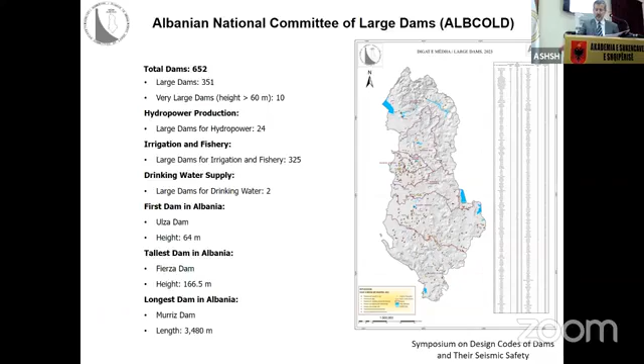The types of large dams in Albania are embankment dams, concrete gravity dams, concrete face rockfill dams, roller compacted concrete dams, rockfill dams with clay core, and rockfill dams with asphalt concrete diaphragm. Also Bovilla, which is a rockfill dam with a geotextile membrane.

The operation purposes of our dams are hydropower production, irrigation, water supply, transport, flood protection, aquaculture or fishery, solar energy, and tourism and urban development.

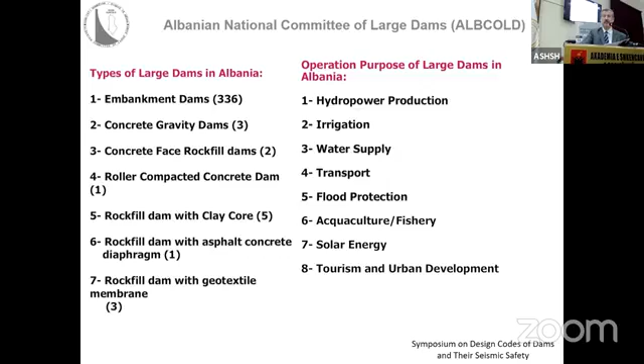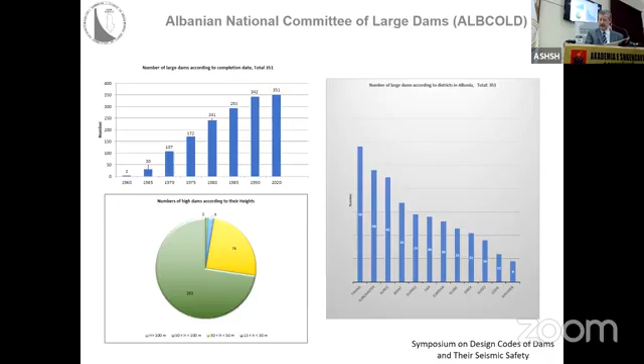Our legislation that is the basis for our activity is, first of all, our law number 8681 for the design, construction, operation, and maintenance of large dams, the law number 45 on civil protection, the decision of the Council of Ministers for the rules of dam safety, the decision on functioning of ALBCOLD, and the decision on structure of the Albanian National Committee of Large Dams.

Also, 2 years ago, there was another decision of the Council of Ministers for the determination of the procedure and terms to obtain the risk attestation for the subject, which is required for construction permission.

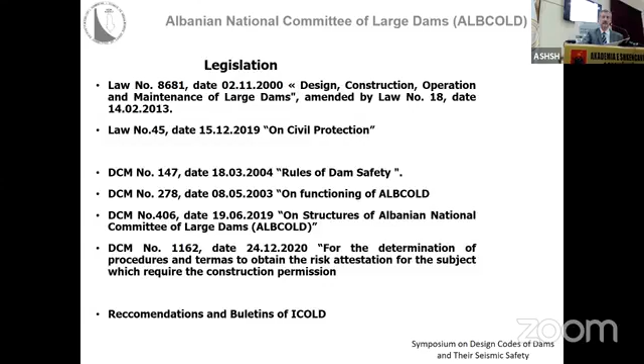This is the structure of our committee. Our committee is a government body under the Council of Ministers, with support from the Ministry of Infrastructure, with a technical inspectorate and technical secretariat.

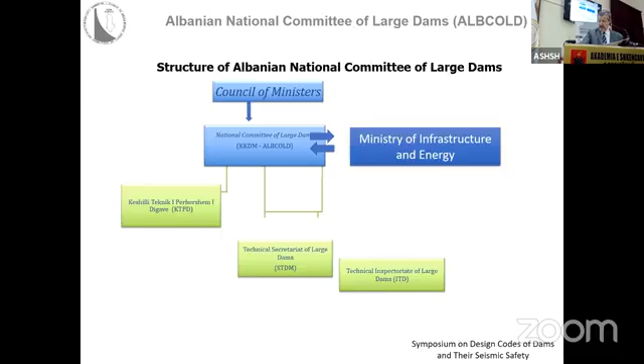Here are the main duties of ALBCOLD: exercise state control for the safety of dams, organize and approve the preparation of legal and technical documentation in this field, support technical progress in design, construction, operation, and monitoring of dams, promote the large dam sector, approve projects for construction of new dams as well as rehabilitation projects of existing large dams, inform the Council of Ministers about the condition of dams and give opinions on their improvement, and represent the Albanian state in ICOLD.

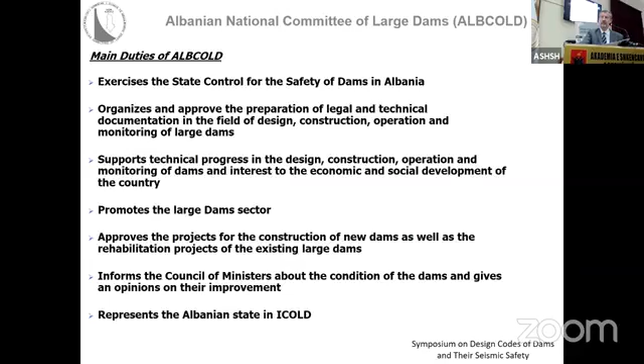Main problems of large dams in Albania: old age of large dams—a lot of them are more than 45 years old; increase of urban area below the dams; old technical standards for design, monitoring, and safety of large dams; sedimentation process of the reservoir.

Lack of maintenance and monitoring of existing dams, lack of technical audit from independent qualified experts and certification of dam safety, lack of study for the future of dams and their reservoirs, lack of dam asset evaluation and management, and climate change and environment protection.

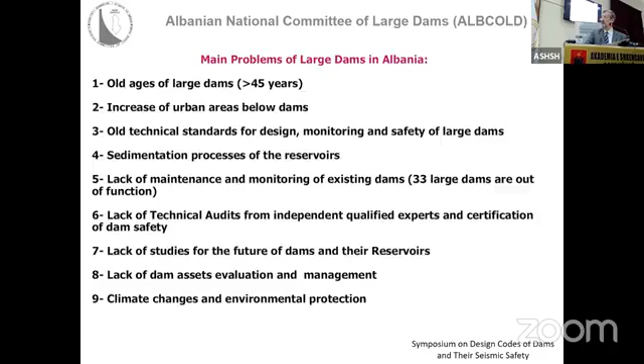Main challenges for the future of our sector in Albania: preparation of new technical standards for design, monitoring, and safety of dams; improvement and update of dam legislation; institutional and organizational reform in the dam sector according to European experience; modern programs for maintenance and monitoring of large dams; certification of dam safety; and training of new technical staff for monitoring and safety of large dams.

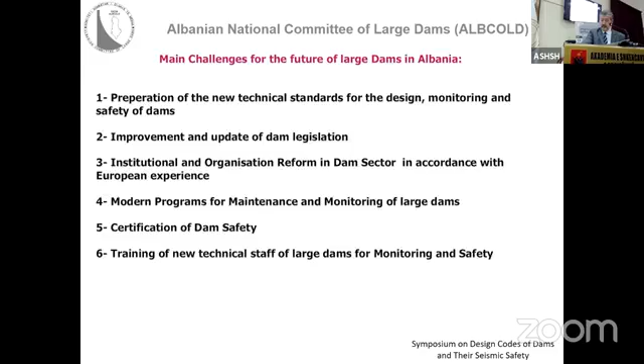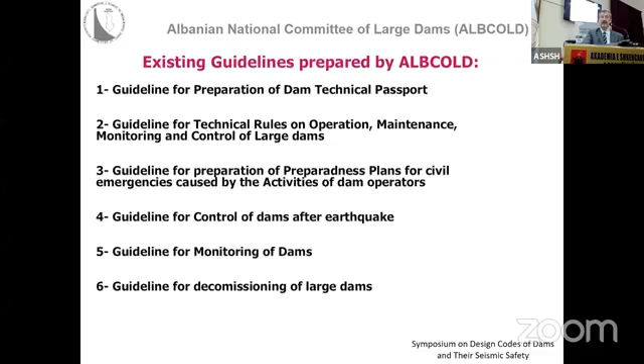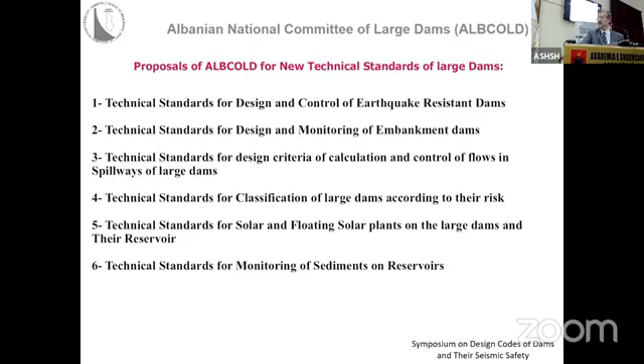I know this is a one-day conference about codes and seismic design, but I will focus on my own expertise and the benefits it has to offer.

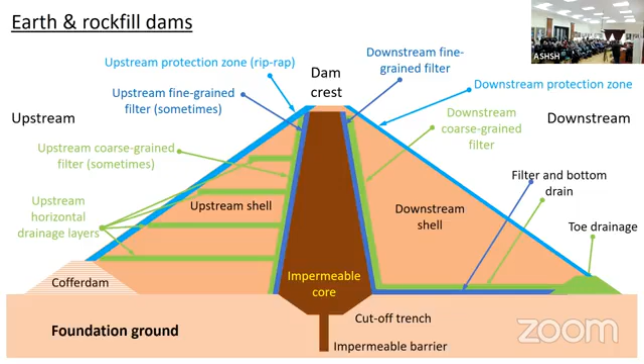You obviously know in this room the main parts of an earth dam. You don't need much explanation from me, but the main ones that actually contribute to the strength of an earth dam are the shells, the upstream and downstream shells, and the impermeable core itself.

Usually the shells are made of free draining, coarse grained material, although on occasion they can also be weak or weathered rocks. In that case, especially in the upstream part, we use horizontal drains to avoid serious conditions during rapid drawdown.

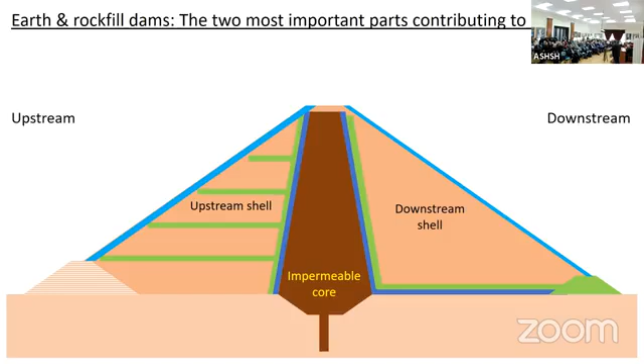Especially with seismic loading, we see amplification of the acceleration through the dam. We may have an acceleration at the base which becomes much larger at the crest. So when designing an earth dam, we have much more serious earthquake loading being applied to the dam.

There has been a lot of discussion worldwide about what is the appropriate acceleration to use. Most of the methods used today will do something I will show you in the next slide. However, we have even seen designs where, because of the very large acceleration close to the crest, they introduce reinforcement like the one used in reinforced embankments in the shells close to the crest.

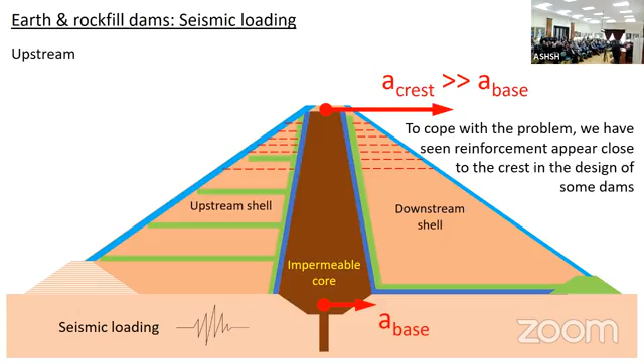This alleviates the problem because in the past we have seen very, very large accelerations being applied even when doing a slide analysis for the whole dam. This kind of separation sort of alleviates the problem and brings more representative values of the actual accelerations used in this kind of analysis.

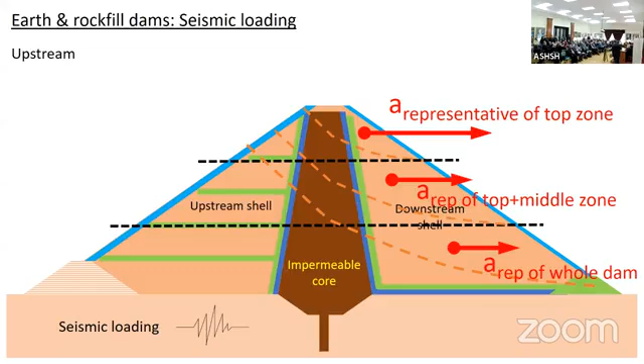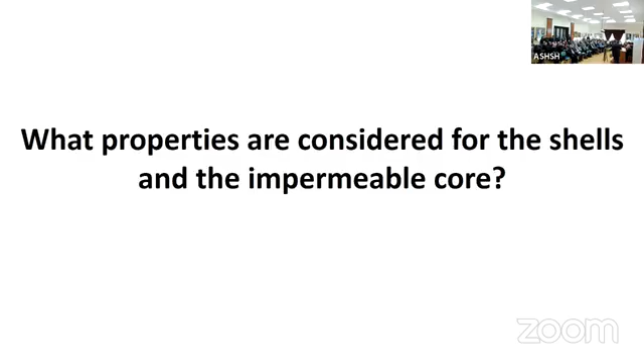However, my main focus is the following: what properties do we consider in the analysis we carry out for earth dams? Many times we have seen values as low as 35 or 40 degrees assumed, even for free draining shells used in earthquake analysis.

Here I have run an exercise where I have taken an embankment dam. For simplicity, I have taken out the earth core, the impermeable core, for a moment. What I have done is try to find out what should be the minimum inclination when performing analysis without seismic loading.

If you assumed at the beginning 35 or 40 degrees, and the actual angle of shearing resistance was 40, 45, or 50 degrees in this particular case, I calculated the increase that this kind of assumption introduces in the volume of the earth dam.

Please notice the figures. If you assumed a value of 35 degrees, you can expect an increase up to 15-16% if the actual angle of shearing resistance is 40 degrees for very high dams. For 45 degrees, up to 40%, and for 50 degrees, even up to an impressive 65%.

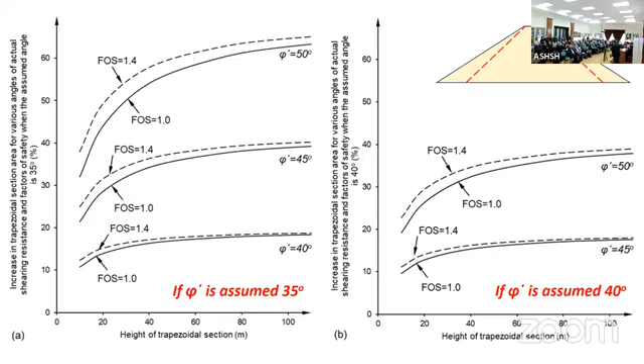A little bit of soil mechanics. After all, I'm the president of the Hellenic Society for Soil Mechanics, so you would be expecting some soil mechanics from me. A uniform soil has practically a single grain fraction. A well-graded soil has all the grain fractions present, minimizing voids and maximizing density. A poorly graded soil has some fractions not in the right proportion. A gap-graded soil has some fractions totally missing.

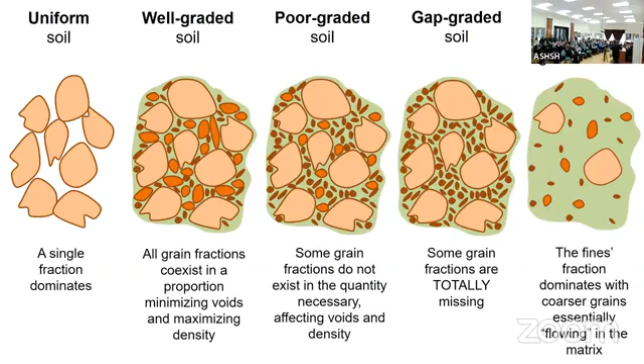The last part of my lecture will focus on materials with gravels and stones but also a very large proportion of fine-grained material. To put this into perspective with actual grain size distribution curves: this green one is what a fine-grained soil with gravel and stones looks like, this is what a uniform soil looks like, this is what a well-graded soil looks like, and so forth.

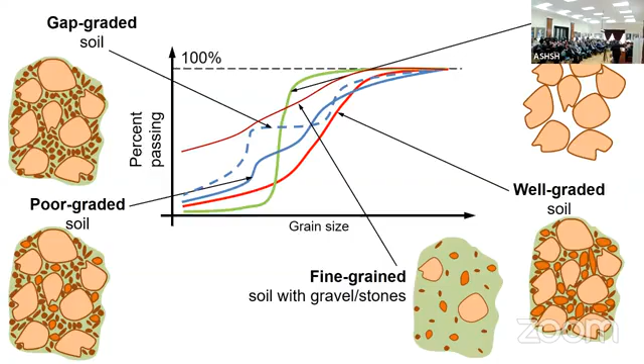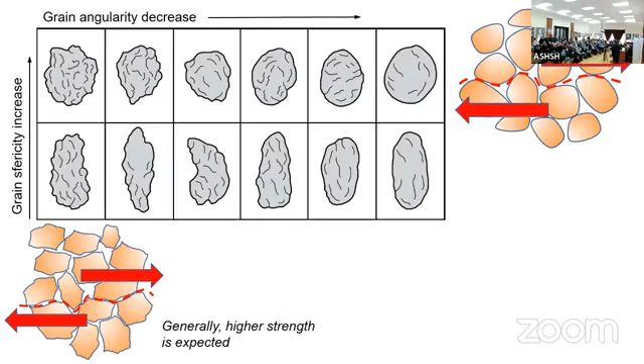Plus the effect of sphericity and also the angularity of the grains. Here I have a small picture which shows how the sphericity increases and also how the grain angularity decreases. We can see material like this that we actually obtain from rivers in order to construct our shells, or we can see material like this, very angular, which we are obtaining from quarries in order to construct our shells.

And this is one of my beloved devices in the laboratory of Edafos that I direct, a very large direct shear device. It's the largest in Greece. It has a shear box with 45 centimeters diameter and a maximum height of 30 centimeters. It was designed in order to be able to measure properties for very high dams, and this is why the vertical stress that can be applied can reach 3 megapascals.

3 megapascals. And also, this is one of my lovely pictures where we have the comparison of the shear box of the large device with its little cousin here that you can see, the shear box of a conventional device of 60 millimeters in diameter. And you can see that the maximum grains that can actually go into the big cell are practically larger than the sample that we can put in the conventional shear box.

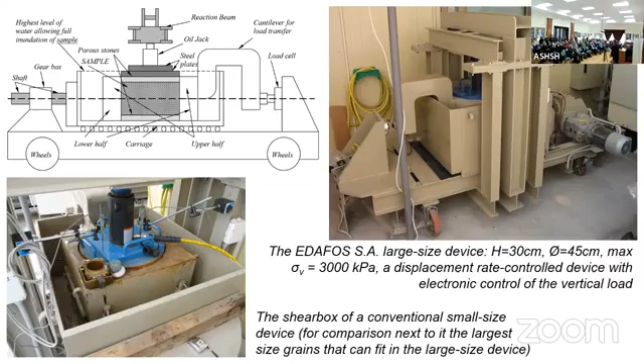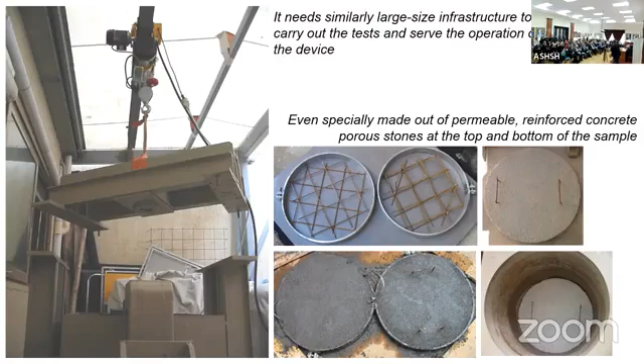This type of machinery needs a lot of infrastructure, large size infrastructure, in order to be able to cope with the various parts, in order to be able to cope with the quantity of materials you want. We are talking about a sample that weighs in the order of 100 to 120 kilos, each sample, plus special care for the porous stones. The porous stones for a small device is something easy that you actually pick off the shelf. But when it comes to a device this large, what is a porous stone? A porous stone is something that you actually have to construct yourself from a porous concrete in order to be able to use it in this kind of device.

So, first of all, let's look at some results from rounded, free-draining, coarse-grained materials and sand gravel mixtures. These are river materials that we are going to see. Lots of materials from many areas of Greece. These are primarily of limestone origin. I have focused in this lecture on limestones because it's a material that we also find in Albania as much as we find in Greece.

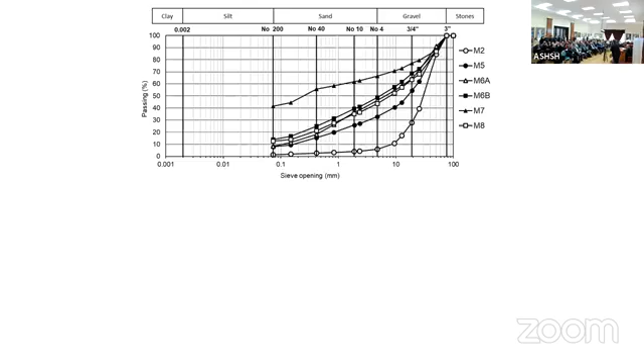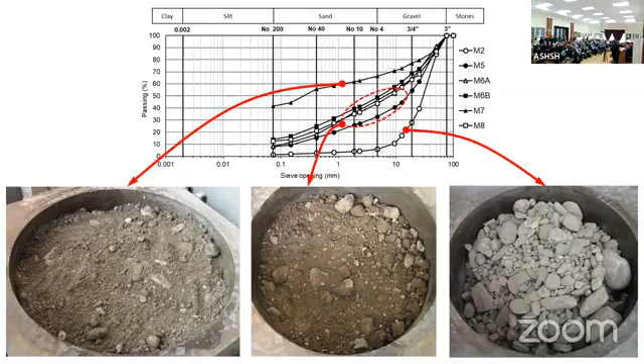And I have some examples in order to be able to relate these grain size distribution curves with the actual material. So here we have a material that is very close to a uniform material, and you can see the maximum grains that can be placed in the device. Here you can see some well-graded materials in the middle, and here you can see a material like this, which has a lot of fines. In this particular case, mind you, these are fines that are non-plastic. And here are the results. Here also to relate with these nice pictures I had before, and here are the results.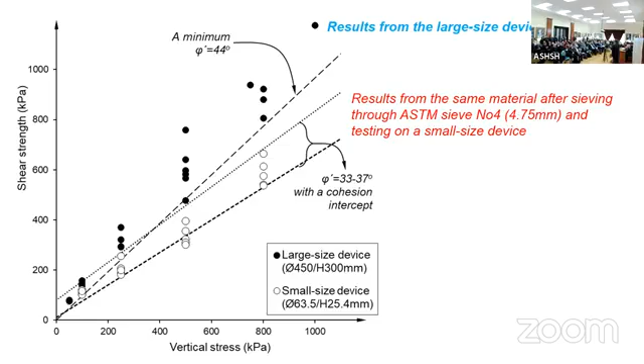I'm not going to do any special analysis. Yorgos Belokas is going to present some very cool engineering analysis in the face of Eurocode 7 later on in the afternoon on the same results, but please look at the differences. The minimum value of the angle of shearing resistance measured in all these materials from the whole country was 44 degrees. The minimum. And if you compare to what you would obtain from a conventional shear box device, if you had taken all the coarse grained out, it would be in the order of 33 to 37. So try to look at the benefit we can expect here and look at the minimum values.

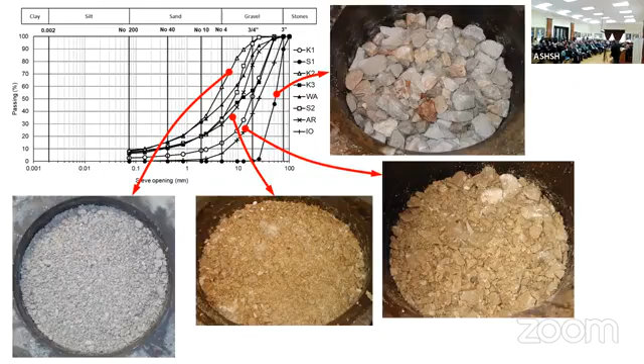And then if we go to angular free-draining coarse-grained materials from quarries, again, only limestones this time. Again, I have some pictures in order to be able to relate with the grain size distribution curves. Uniform soils, well-graded soils here and here, soils with many more fines that also come close to sand with gravel.

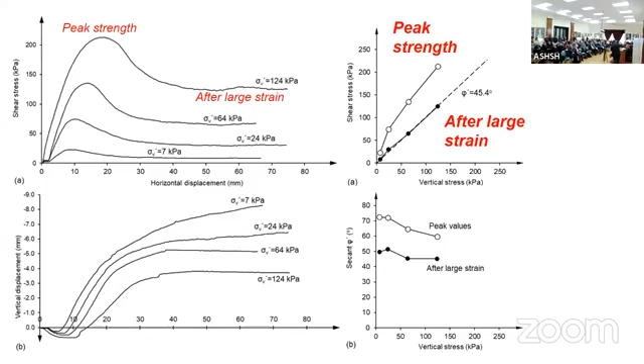And here I have a typical example, because in this case we have used some very high relative density samples in order to measure the shear strength, and you can see how the peak strength develops and then it falls to the strength after large strain, and you can look, for a specific soil, at the amount of difference between the peak strength and the strength after the large strain.

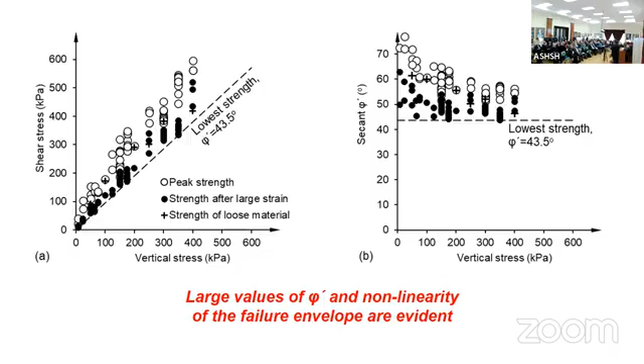And again, I will focus on the general view of things. Please again look at the lowest strength even after large strain. It never falls below 43.5 degrees again. And if we go to the peak strength, somebody may argue that I can use it when it comes to seismic loading. It never falls below 50 degrees.

And especially because of the non-linearity of the failure envelope that we have in coarse-grained materials, expected because it is like having a rock mass which is very broken, where we would expect non-linearity. So this is something that comes very close to rockfill. You can see that for very low vertical stress, the values are extremely high and much higher than the values we use in common design assumptions.

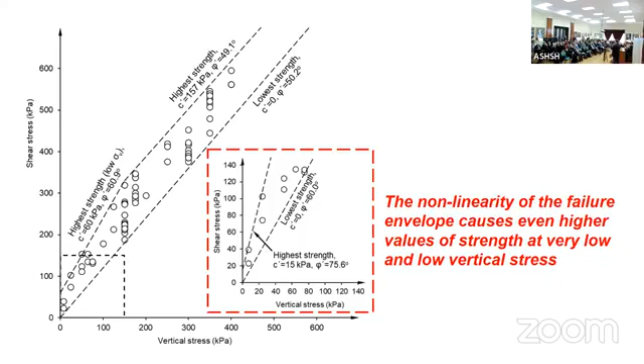And even if you go to the values after large strain, again, you can see that we have these values of 43.5 degrees, even up to 52. And especially for the low vertical stress, again, due to nonlinearity, even above 45 degrees. So again, there is benefit here to gain from actually measuring and making sure that we keep measuring in the construction of our dams the values of shear strength that we can obtain from these materials.

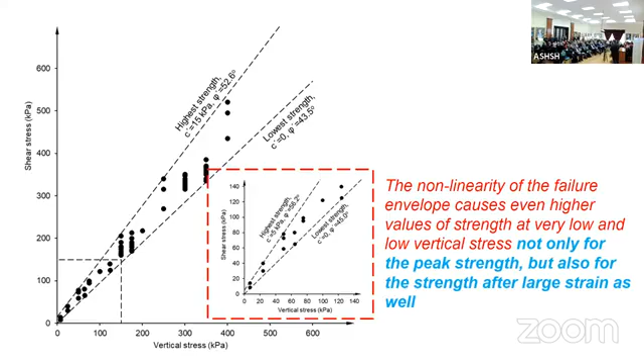And finally, we often fantasize, I use on purpose the specific word, we often fantasize when we talk about impermeable cores that they are made of pure clay. Well, the reality has shown that this role of the impermeable core has often been fulfilled by weathered or weak rocks, like flysch, a very common material that we can find also in Albania, chalk, weathered gneiss, serpentinite, schist, and whatever weathered rock we can find.

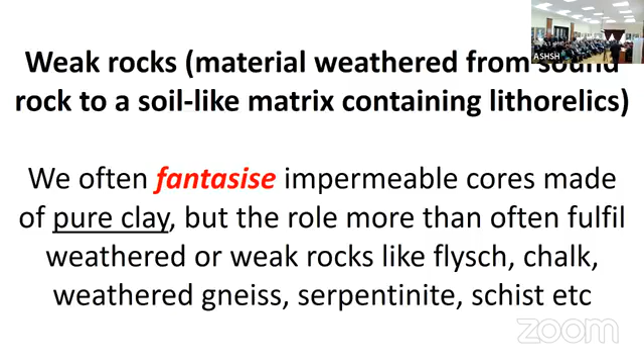Again, this material can be placed in the device with one additional benefit, that exactly because of the size of the device, we can place instruments inside the shear box that will measure the pore pressure that may want to develop along the sliding surface. The problem of the shear box is that quite often we are afraid that what we are measuring is not really drained. And this is a problem we have in the small devices.

But if you go big, this big, then you can take off the market a common sensor that we use and we place in actual large dams. This is the kind of sensor we would place in the field. You can place it in this kind of device and know the actual pore pressure that is being developed along the sliding surface.

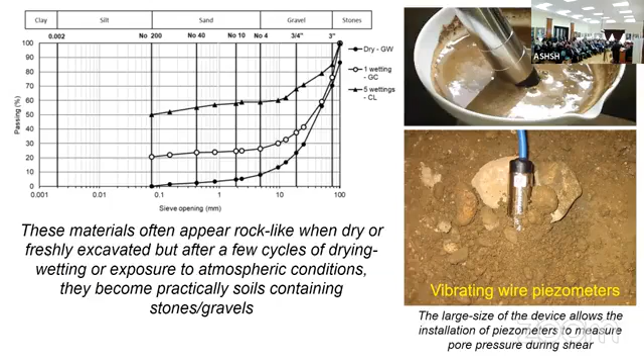So these materials, we see them in the field and they look rock-like, but once we introduce a couple of wetting-drying cycles, they actually turn to a fine-grained medium with stones and gravels. We can measure the pore pressure and actually use it in order to interpret the shear strength data that we obtain. And here is the look of it.

Weathered schist, weathered serpentinite, weathered gneiss, weathered siltstone, flysch, chalk, materials that we normally assume or measure in small size devices, angles of shearing resistance in the order of phi 25, 26, 27, 28, and yet these materials have a much larger angle of shearing resistance, especially combined with a value of cohesion.

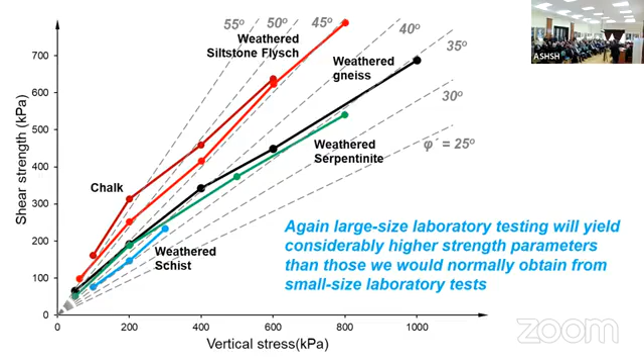Therefore, quite often, the strength of both shells and impermeable cores is being underestimated. We are using assumptions which, yes, are on the safe side, but they cause the need for larger volumes. And also, when it comes to seismic loading, exactly because it introduces a need for higher strength, we have many more problems, and we have seen even the need for reinforcement close to the crest.

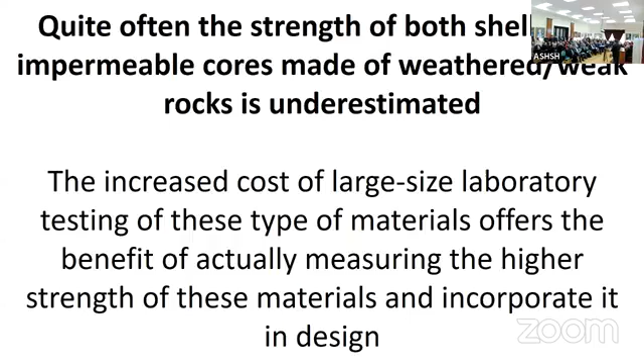The kind of results I have shown you is that if we actually go forth in measuring the properties of these materials, there are a lot of benefits in order to cope both with the seismic loading and the need for lower volumes.

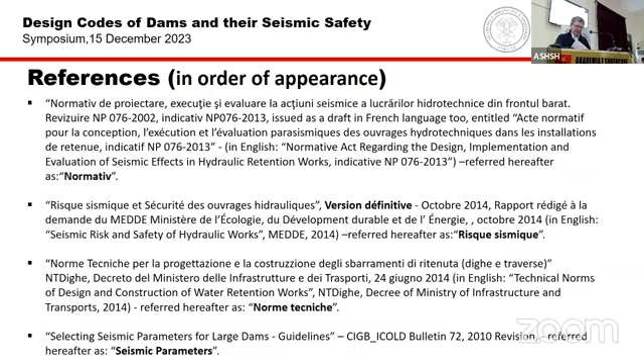We will start this presentation with our opinion, supported by a series of arguments, that Albania must improve its rules regarding the seismic design of dams and other hydraulic structures. Hereafter, for simplicity's sake, all these structures will be referred to as dams. As known, for other engineering structures, such as buildings and bridges, a few years ago Albania effectively adopted a series of structural Eurocodes, more specifically Eurocode 8, Design of Structures for Earthquake Resistance. However, dams are not included in Eurocodes.

At this point, improving the rules and provisions for seismic design of dams is necessary, as a considerable amount of time has passed since the last revision. Practically, it occurred 35 years ago. It is now obvious that Albania must reflect as soon as possible the achievements in the field of seismic analysis and design of dams during the last 3 decades. A new engineering code would ensure a safer seismic design as well as a better approach to the rehabilitation or strengthening of existing dams if needed.

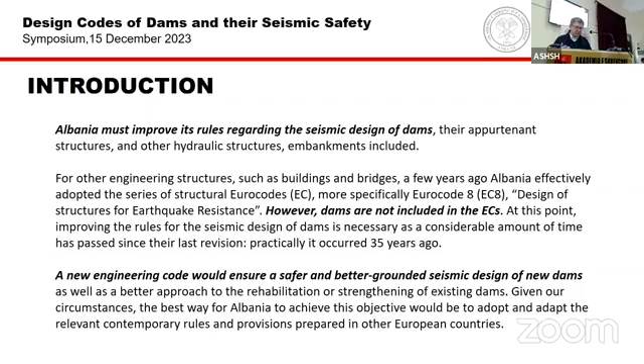Given our circumstances, the best way for Albania to achieve this objective would be to adopt and adapt the relevant contemporary provisions prepared in other European countries. In various seismic-prone countries around the world, there are numerous technical documents, rules, and guides concerning this issue. Normative notes that in 2004, the ICOLD European Club prepared a summary guide collecting such documents from European countries. Other similarly valuable works may have been carried out later, but they have not been available to us.

To our knowledge, a unified European standard to cover dam design, or even only a seismic standard as the Eurocodes are, does not exist. At the same time, there is an excellent source that provides useful engineering material on dam safety in all aspects: the International Commission on Large Dams, ICOLD, called in French Commission Internationale des Grands Barrages, CIGB. For a long time, through its bulletins, ICOLD has been regularly producing publications containing various technical experiences, guides, and recommendations that are very valuable to the hydraulic engineering community.

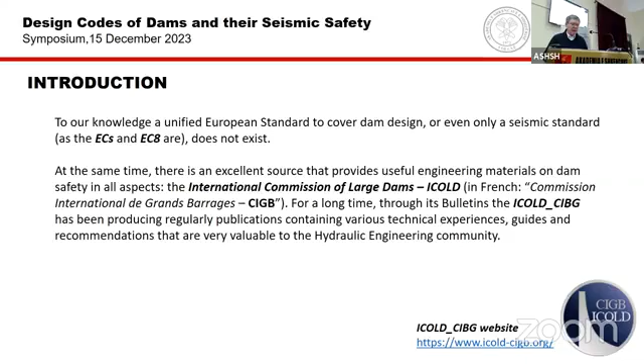So when preparing and adopting a document with provisions regarding seismic dam design, thousands and thousands of pages provided from ICOLD and other sources throughout the world are available as reference guides. However, in the case of Albania, a country that aims to join the European Union, it would be more appropriate to adopt provisions similar to those prepared in European countries. The rationale is that although dams are not covered by Eurocode 8, which is already in wide use in Albania, it contains some key seismic requirements no different to those used for dams.

Firstly, for all building structures, dams included, the seismological design data, magnitudes and seismic acceleration values, are taken in principle from the same sources: the maps of the seismic hazard of the country, and if needed, specific microzonation studies. Also, the engineering procedures used to evaluate the stresses and strains, safety factors, and so on, are rather similar, particularly when dams are built of concrete or masonry.

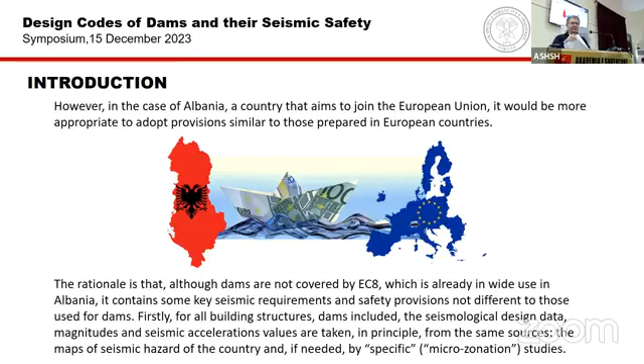In fact, Eurocode 8 is cited in quite a few cases in current documents on the seismic safety of dams in European countries. Of course, there are also many aspects, terms, and analytical and design approaches which are specific to dams and other hydraulic structures. As such, they are reflected in the relevant international and European technical documents, provisioned as recommendations.

Next, we provide an overview of the analytical approaches contained in the technical documents on seismic dam design of select European countries. This is done only in view that some of these approaches could be adopted in the new Albanian provisions. Overview of seismic provisions in select European countries. The main seismic documents on which we focus here are the French and Romanian ones, Risque Sismique and the Normative, and to a lesser extent, the new Norme Tecniche of Italy, as well as some similar documents from other countries.

The French and Romanian documents reflect, of course, the rich experiences of the respective countries, being at the same time mostly consistent with the ICOLD recommendations. We think they are also in good relation with Eurocode 8. They both contain, apart from their main text, a considerable number of annexes, which may effectively serve to clarify and explain terms and relevant analytical procedures, as well as other helpful information.

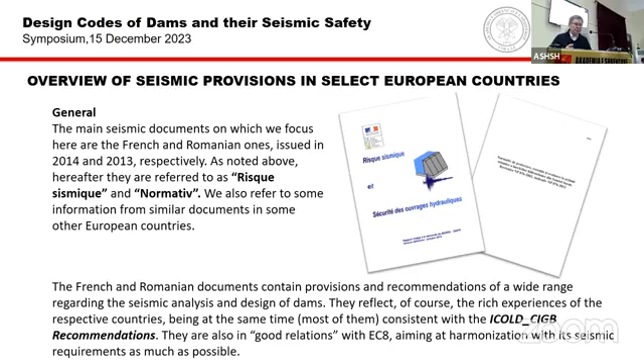Very instructive are some solved examples included therein, where current methods for seismic analysis of different types of dams are used. This is important because while today such analyses are performed using software and computer techniques, which would be used in Albania as well, it is necessary for structural dam designers to know the details of structural seismic calculation of dams, starting from the simplest methods such as the pseudo-static method.

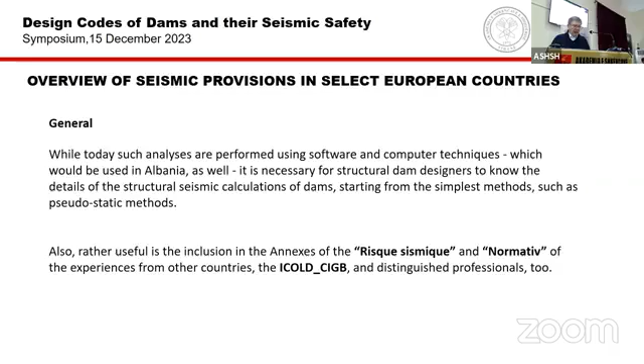Also rather useful is the inclusion in the annexes of Risque Sismique and the Normative of the experiences from other countries and distinguished professionals. The Normative contains information regarding the Indian, American, and Canadian seismic provisions. Risque Sismique similarly contains aspects and provisions from seismic countries such as Austria, Switzerland, Spain, Germany, USA, Canada, etc. Aspects related to the assessment of seismic hazard.

The level of seismic hazard shown on the maps of the territory of a country is often called the normative level. The Romanian Normative stipulates that this is the minimum level to be considered in seismic dam design, and other provisions also say this. The French Risque Sismique makes this implicit assumption as well. The latter provides details about the new seismic map of France in effect from 2011. The territory of France is divided into 5 zones, from the weakest, the first zone, up to the strongest, the 5th one.

The corresponding peak ground acceleration, PGA, values vary from 4% of g up to 30% of g. These values correspond to a 10% probability of being exceeded in 50 years, corresponding to a return period of 475 years. This is consistent with the use of seismic acceleration maps required by Eurocode 8, and consistent with the seismic hazard map expected to be officially approved soon in Albania also.

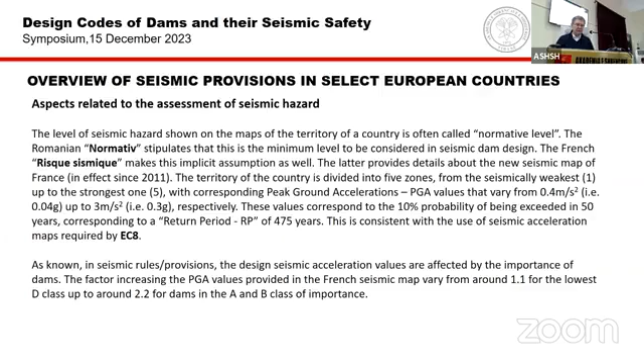Apart from using the normative method, that is the national seismic map, Risque Sismique and the Normative stipulate conducting, when needed, specific seismic studies around the construction site in order to obtain more reliable seismic data. These studies may be done using the probabilistic method and/or the deterministic one. The main outputs of the latter method are, as known, the maximum seismic potential and the reference earthquake.

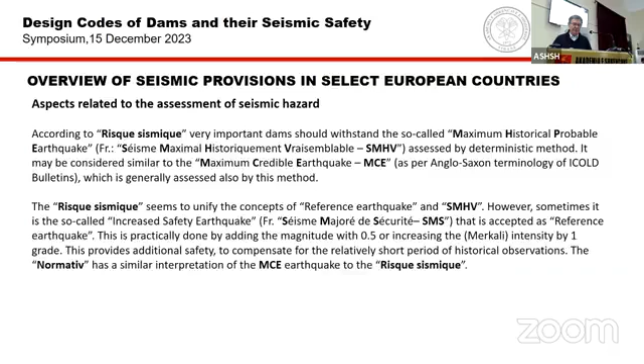The normative has a similar interpretation of the MCE earthquake to the Risque Sismique. The Risque Sismique stipulates that dams shall resist the following earthquakes, selected through specific seismological studies using the probabilistic method. One, a rather strong one, called SES in French, corresponds to the SEE earthquake in English terminology, safety evaluation earthquake. A moderate one, called SBE in French, or OBE in English terminology, operating basis earthquake, must be withstood by the dam. According to the normative, each of the above earthquake types is to be applied in seismic analysis of the dam separately.

Regarding the return periods of the OBE earthquake, these documents require it to be not less than 100 years. The importance classification influences considerably the assignment of return period values to be chosen when specific studies are carried out using the probabilistic method. The Risque Sismique gives the following return period values for the SEE earthquake. This table is very important. Here you see the class of dam, A the highest and D the lowest. For the A class of dam, the return period according to Risque Sismique is 5,000 years, and so on for B, C, and D at 500 years. Meanwhile, a value of about 200 years is given in Risque Sismique for the OBE earthquake.

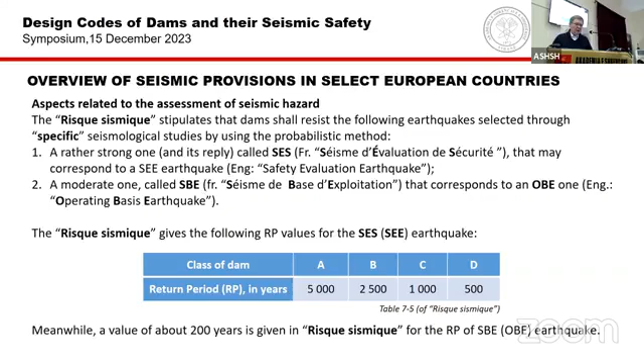The ICOLD recommends some very long return period for the SEE earthquake in the seismic parameters. In addition, the ICOLD stipulates that SEE ground motion shall be taken as the maximum of the probabilistically and deterministically evaluated ground motion. On the other hand, it is considered appropriate to choose a minimum return period of 145 years for the OBE earthquake. That means 50% probability of not being exceeded. Meanwhile, the Risque Sismique recommends that the final choice between the probabilistic method and the deterministic method should be left to the project owner, in French, maître d'ouvrage. This decision can be determined by the importance of the structures, etc.

In some European countries, the return period of the SEE earthquake or its equivalent MCE chosen for very important dams varies as follows. You can see here some countries: Switzerland, Germany, and the Norme Tecniche d'Italia give us return periods for the equivalent earthquake, with values that go up to 2,475 years for dams of great importance. But our colleague from Italy will maybe inform much more about this.

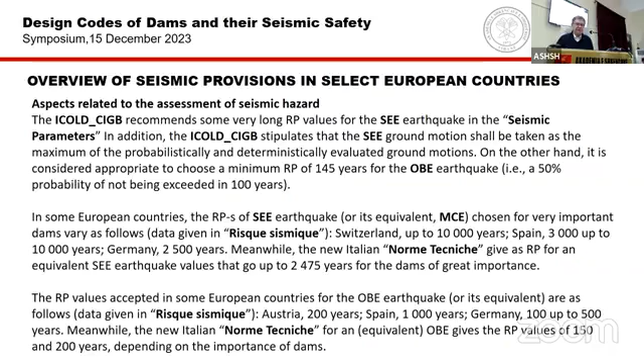The return period values accepted in some European countries for the OBE earthquake or its equivalent are as shown in the PowerPoint presentation. Meanwhile, the new Italian Norme Tecniche for an equivalent OBE gives return period values of 150 and 200 years, depending on the importance of dams. Safety criteria. Resisting an SES in French, or SEE in English terminology, earthquake means that the structure must meet the requirement of ultimate limit states, shortly the no collapse requirement, or in French, état de non-effondrement de la structure.

Whereas for the OBE earthquake, it must meet the requirement of serviceability limit states, or limitation de dommage.

As stipulated in the Risque Sismique, the safety criteria are in principle not different from those of other built structures provided in the Eurocodes, particularly Eurocode 8. However, the Risque Sismique and Normative, Romanian, also accounts for the specificity of dams related to control, verification of stresses, strains, stability, foundation, and so on.

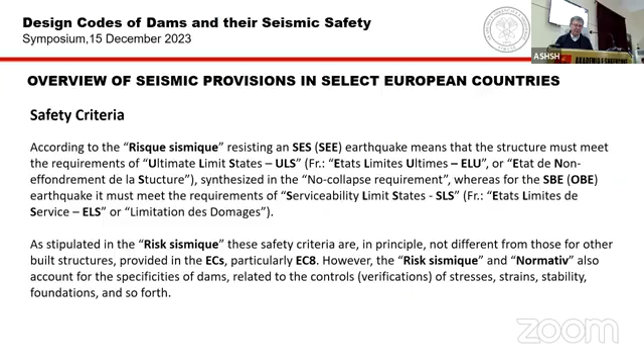Aspects related to the method of seismic analysis of dams: both Risque Sismique and Normative consider two kinds of dams, rigid dams (concrete, masonry, arch, gravity, buttress, etc.) and earth dams. Both documents indicate ways of structural modeling, linear and non-linear, and calculation methods from pseudo-static to dynamic. Regarding the latter, the two documents present the spectral modal analysis and the principle of time history analysis and direct integration.

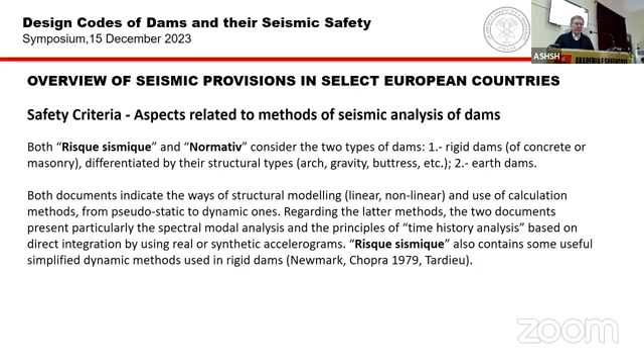Risque sismique also contains some useful simplified dynamic methods used in rigid dams: Newmark, Chopra, Tardieu methods, etc. Regarding the spectral modal analysis, it's worth noting that the Normativ requires the number of mode shapes considered to be 10 up to 20, in both concrete and earth dams.

The following figure, extracted from a Normativ concrete dam example solved using the SAP 2000 program, shows the model based on the finite element method and its first four vibration shapes corresponding to the full reservoir situation.

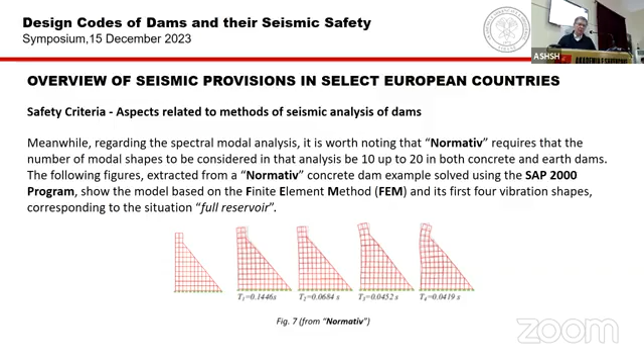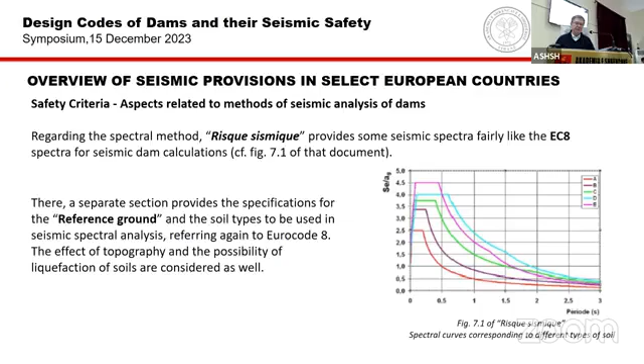Regarding the spectral method, Risque sismique provides some seismic spectra, fairly similar to Eurocode 8, for seismic dam calculation. A separate section provides specification for the reference ground or soil types to be used in seismic analysis, and regarding the forces acting on a dam during an earthquake.

Both Risque sismique normative and other provisions from other countries dedicate a section to the seismic hydrodynamic pressure from the water of the reservoir, based on the well-known Westergaard and Zangar solutions.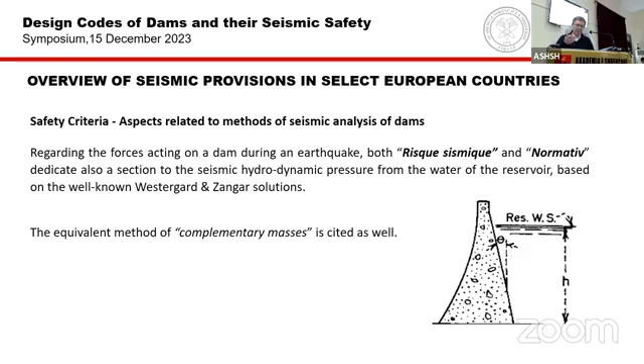Risque sismique devotes considerable space to the use of the pseudo-static method, a simplified method in earth dams, as known—for example, the Bishop method—which serves for the preliminary assessment of slope stability and the determination of the critical pseudo-static coefficient Kc, a starting factor for the latter, more precise methods.

Regarding the simplified dynamic methods, Risque sismique details the ones proposed by several distinguished experts in the field, from Newmark, Chopra, etc. There are also two Greek professors, Bouckovalas and Papadimitriou, from 2003. In addition, it mentions some linear and non-linear, elastic and post-elastic dynamic methods, for example those conceived by Seed and other distinguished professors.

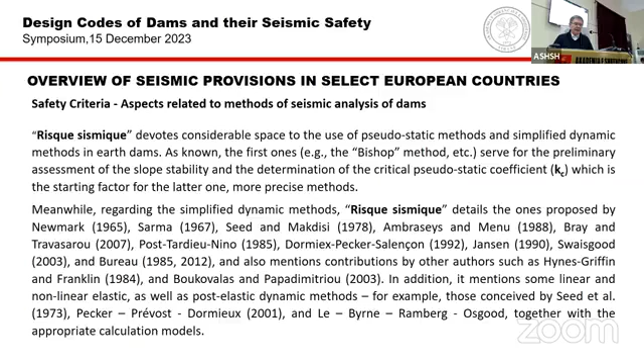Conclusions and recommendations: it is necessary for Albania to improve the seismic design provisions for dams and other hydraulic structures. Adopting and adapting seismic rules from other European countries would be an appropriate approach.

To undertake this task, there is a need to form a competent working group of Albanian professionals with good knowledge and work experience in areas such as dam analysis and design, earthquake engineering, engineering seismology, and dynamics of structures. This group should be tasked with choosing the models of respective rules, provisions, or standards to be adopted. Albania now has the potential to create such a group or task force.

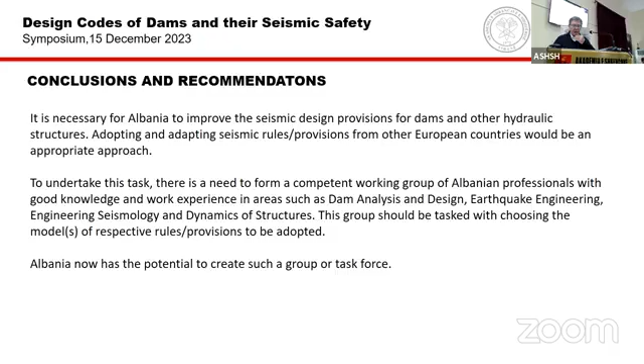The seismic culture of the Albanian engineering community today is much improved compared to 35 years ago, when the last revision of the Albanian rules occurred.

However, undertaking and realizing such a nationally important initiative requires the fulfillment of the following prerequisites: first, the relevant Albanian engineering, scientific, and governmental institutions must duly consider and support it in all aspects, as was the case in the adoption of the Eurocodes, particularly Eurocode 8.

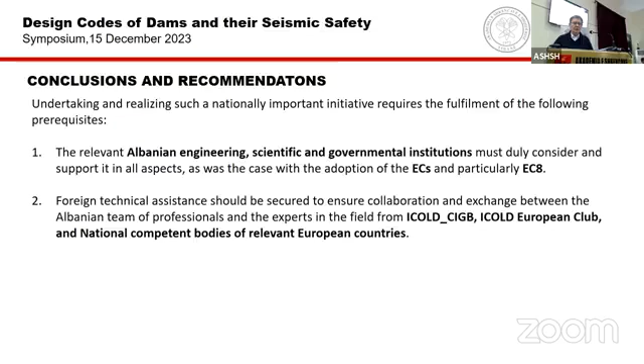Foreign technical assistance should be secured to ensure collaboration and exchange between the Albanian team of professionals and experts in the field from ICOLD-CIGB, ICOLD European Club and national competent bodies of relevant European countries. Thank you very much.